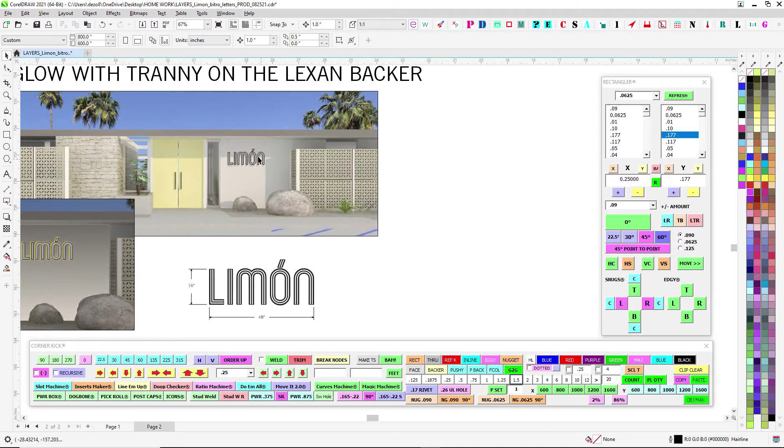So this is the Bitro letters that we're sticking on a residential house. The challenge is we have to wire it first, but when we're using Bitro, we always solder our connections to keep shadows to a minimum. So the challenge is pre-wiring and having wires already out there, and then figuring out how to do Bitros in the field.

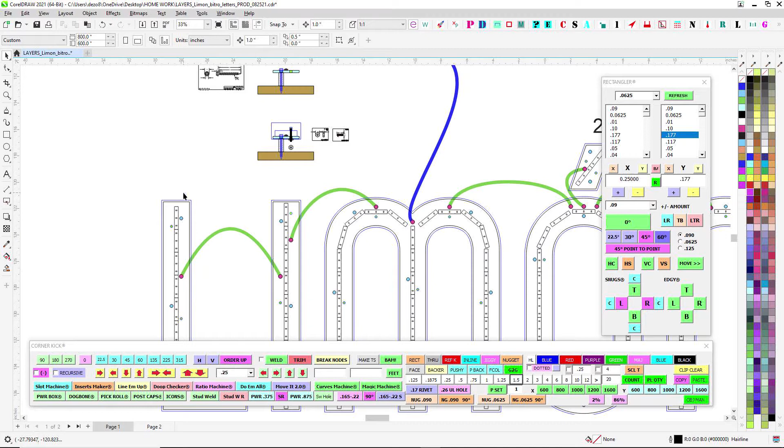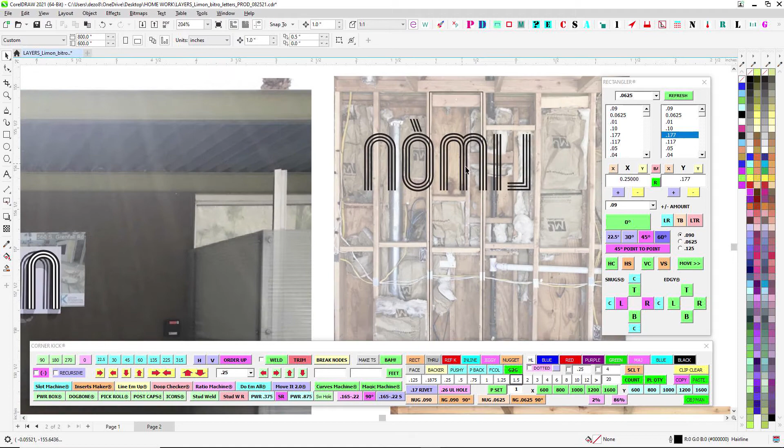Normally Bitros leave the shop completely self-contained, leashes already soldered, hardware and studs sticking out. But I was thinking we also need to be more secure, being that this is on a residence. It's easy to walk up and pull these off the wall unless they're secured more than just the normal studs we use. And we're trying to dodge all this flotsam and jetsam here.

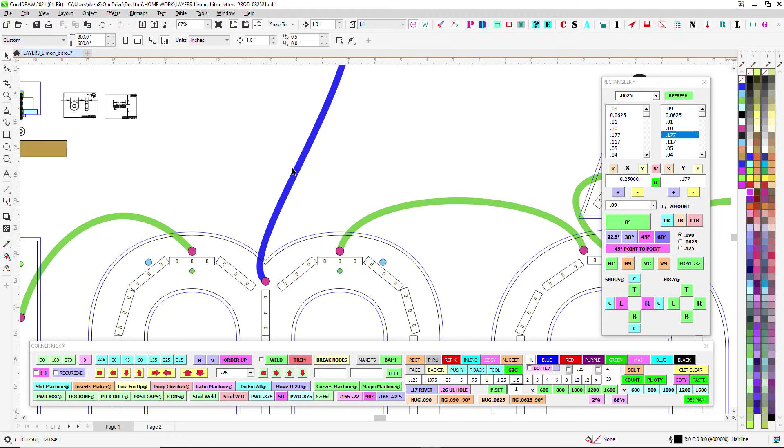So I'm proposing we have power jumps here. From the L to the I, the greens will just be jumps, and from there these will all connect, so everything works its way to the big M. In the middle we'll have a single leash out that goes to the power supply box on the back of the wall, similar to what's in our office.

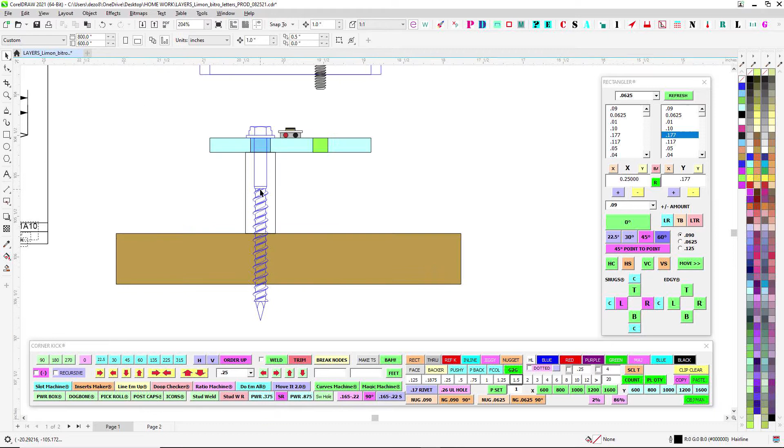So in order to pull this off and not have these self-contained in the shop, we're going to put them together in two parts. I'm proposing we do 3/16 polycarbonate like we usually do, with a 1-inch standoff, and a 2 1/4 blue screw.

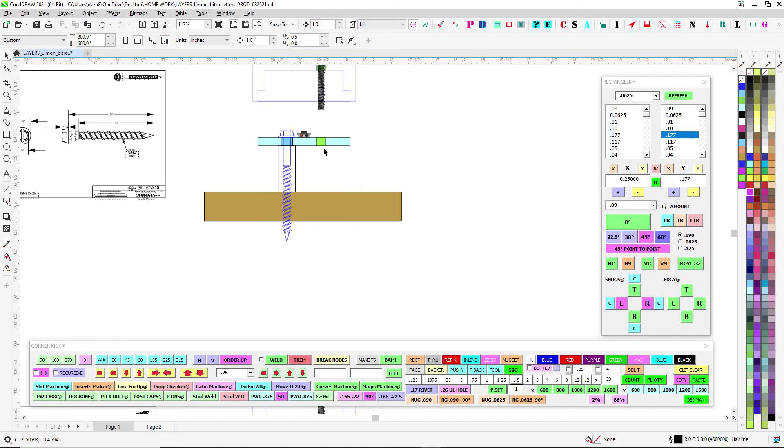I'm proposing 5/8 sheeting. It looks like they've got plywood here, so even if that's half inch or whatever, you're gonna have to make sure we miss all this stuff. So when we go to install this, you'll put the blue screw through the stucco.

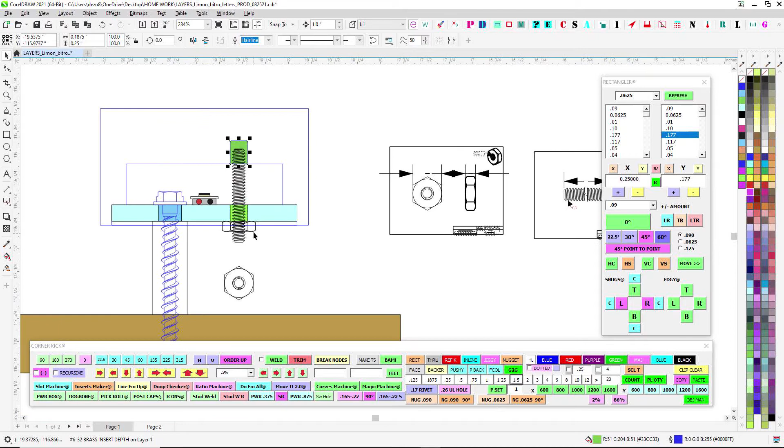This is a 1-inch standoff, the LEDs will be in the middle of the stroke, and then we'll do number 6 studs by 1 inch with brass inserts in the face. They'll come through and you'll have to blind nut them from the back to hold the letters on. So again, we want maximum security.

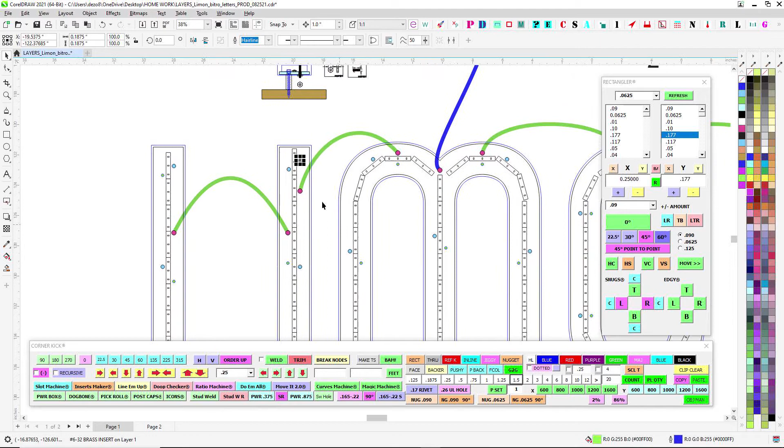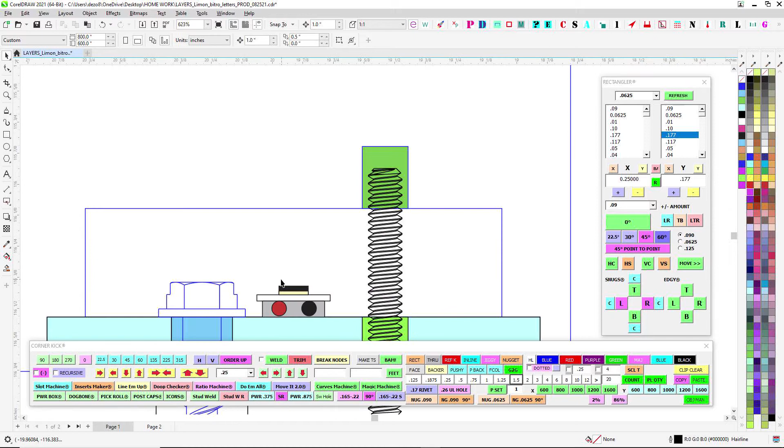Now the issue is there's no room inside here for wire nuts. You can put a wire nut, but the chances of getting shadows means you'd have to turn it on, wire nut it, try a certain way, then test for shadows, and there's probably a good chance you'll get one. That's why we solder these and silicone them so the solder and wire stay below the level of the light.

This being said, we're going to have to try to solder these in the field, really the only way around it. Unless we try wire nuts, either install can do it, or a fab guy goes over after these get up, since they have experience. Bring your solder stuff and an extension cord or generator, and we can make these connections in the field and keep shadows to a minimum. It's already going to be challenging with the LEDs in there.

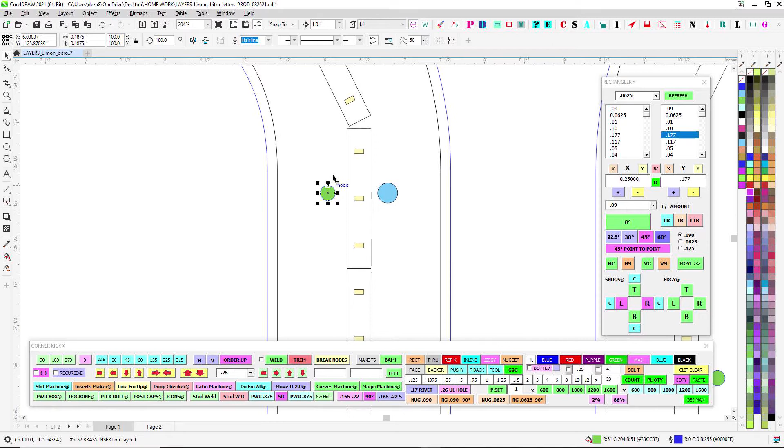I'm hoping the stud mount things don't give us trouble with light. Usually with Bitros this stud mount can be placed strategically, but it's also the mounting point. So the challenge here is we've doubled our penetrations, which causes more potential for shadows.

So when install goes and puts this up, I'll give them a pattern for where the power goes, proposed, and I'll give them a pattern that'll also include where mounting goes.

Instead of just using the pattern once and tearing it down, I suggest putting the pattern up. If you have to move any of these, mark it, drill it, and make sure the pattern comes back in good shape. Then we can reverse transfer to our polycarbonate and draw where the new holes are, should we need to adjust any based on where everything lands.

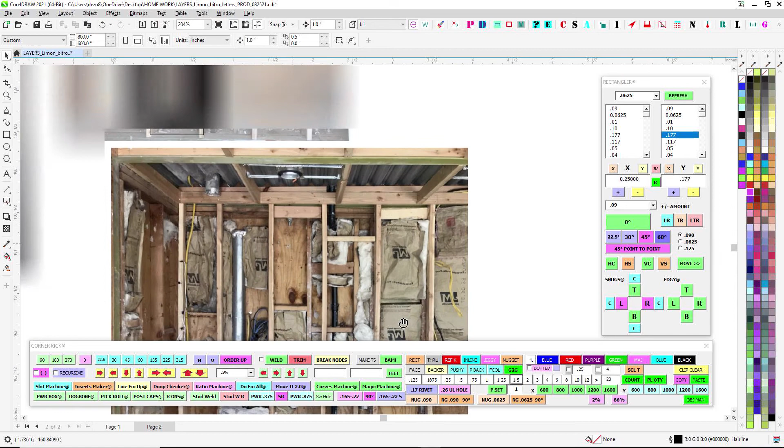You're going to have to move a little left or right, because this pipe here is pretty much right where the I is. So this might have to fudge over a bit, which moves this over, which puts the power supply hole right there. Or if you go back this way, that should clear everything, if you go left or right as you're looking at it.

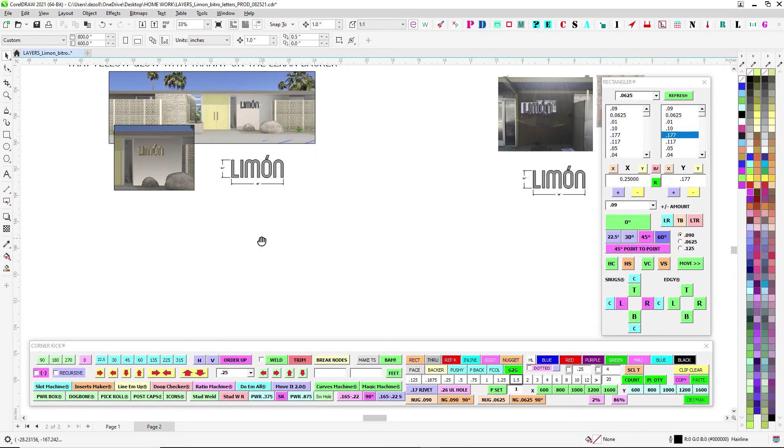So if you have to freestyle a little with the pattern, I suggest keeping it in good shape and bringing it back if you adjust any holes. If that looks good to you, hit me up. I'd like to conference on this, have a little powwow, see what's up. Definitely hit me up about this, but this is kind of how I see it going. If this works for you, let me know.